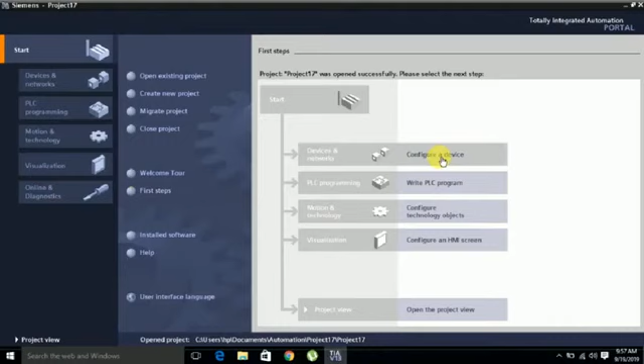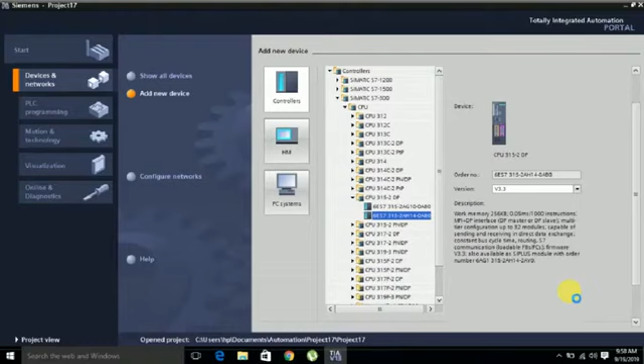So today first I will select one CPU. This CPU selection depends upon which CPU you have available. If you have one physically available, select it according to your physical model and series. I have this 315-2 DP, so it's like this. Then I will add one card.

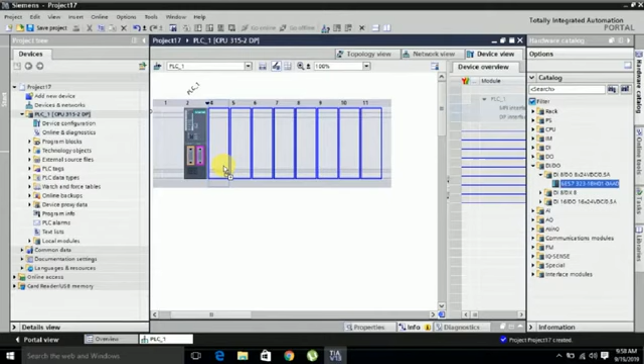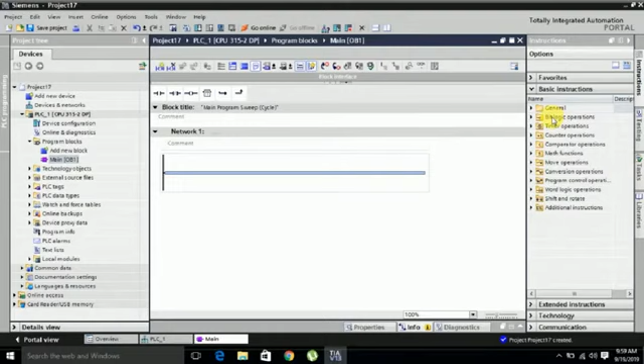Okay, our device configuration is complete, so I will go to the main block, OB1, and do the programming that you already saw in my last video. We already discussed general instructions, bit logic instructions and timer operations. So today we will go to counter operations and see this counter.

In Siemens there are 3 types of counters available: counter up, counter down and counter up-down. Normally counter up is used; counter down and counter up-down are not used much. In other PLC models mostly only counter up is available. In some cases down is available, but up-down is normally not available in other brands like Allen Bradley, Mitsubishi and Delta. It is only for Siemens.

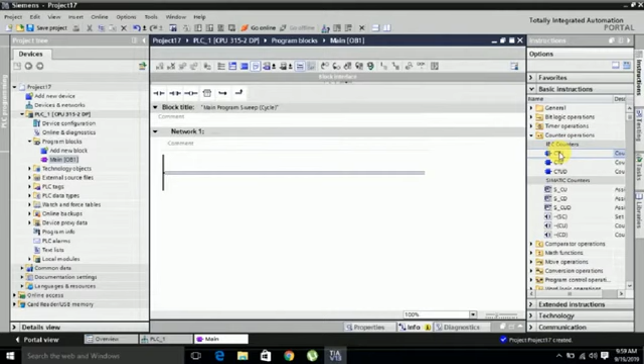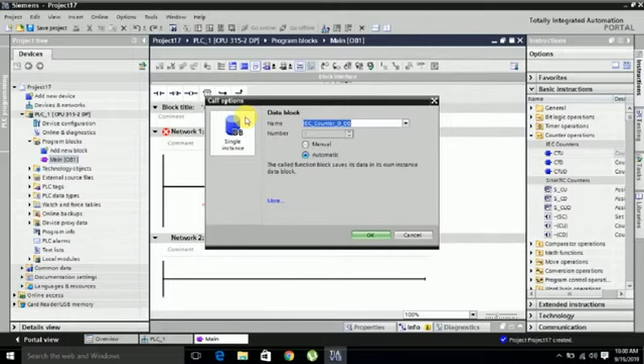So first we will check this counter up. When I click it, it will give the data block. Actually that is a block. Another language is the function block language, which we are not using, but in ladder we sometimes mix block language and instruction list. Here they show the data block, and later in our video we will see this add new block, what it means, and you can see this data block in detail.

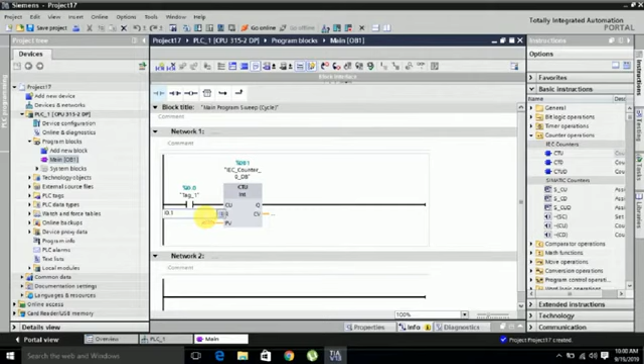Here we use one input for enabling, I0.0, and for reset I directly put I0.1. You can also write it directly here, no issue. The PV shows your counter preset value, how much you want to count. When it achieves this value, your output will be enabled. So I will go to the output also.

Q shows the output in Siemens, as I told previously, and CV is if you want to see your counter value in any SCADA or HMI display, you can tag it here and then this tag is attached to the SCADA or HMI. Here we are not using SCADA, so you can spare it. When I do SCADA and HMI, I will show you how to use this CV, because it is required to connect HMI and SCADA.

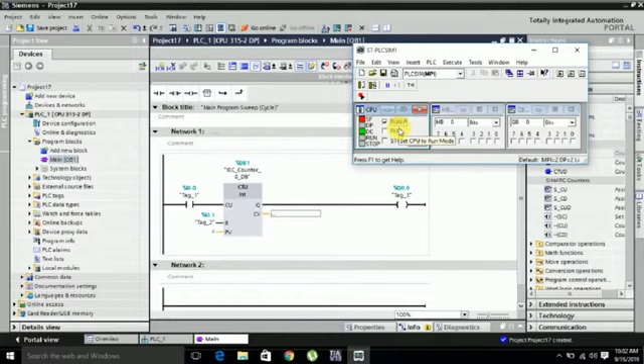Okay, we will go and simulate. This programming is complete for this counter up. I will run the PLC. Now our PLC is running. Here I will go to our interfaces, PG interface Profibus, and PG/PC interface PLCSIM. I will do the searching, and I will load.

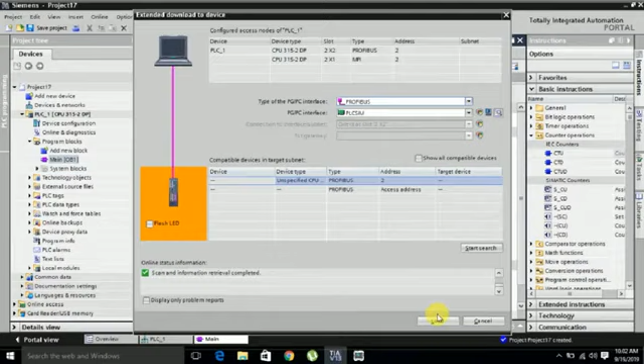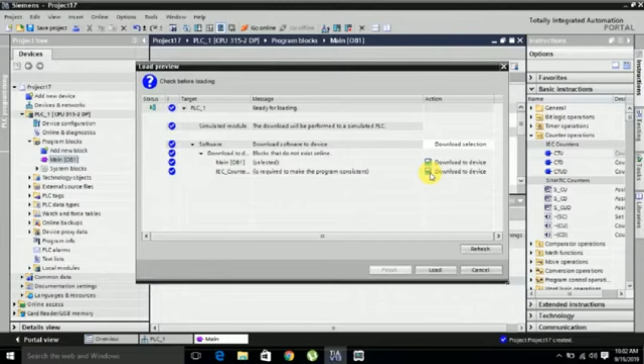Okay, when you use any counter or any timer, as I already told you, you also need to select download to device, because it's a separate block that you need to download. I already told you before that it is a block. So I will open the monitor also. You can see here in monitoring.

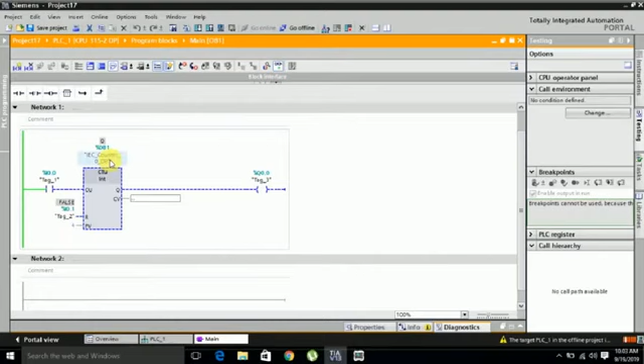Okay, we'll start. You see, till now our counter is not enabled, it is off, and its value is also false because we have not reset. Its target value is 4 and the counter value is 0, and our output is also off. I will show here. First I will use one bit. I will turn it on.

Okay, one. I will turn it on one time and close. Here is one time on. Then I will go second, 2, third, and on the fourth it should be on. You see here, when the counter value 4 matches our PV, it gives the output. When we reset, the value is again 0.

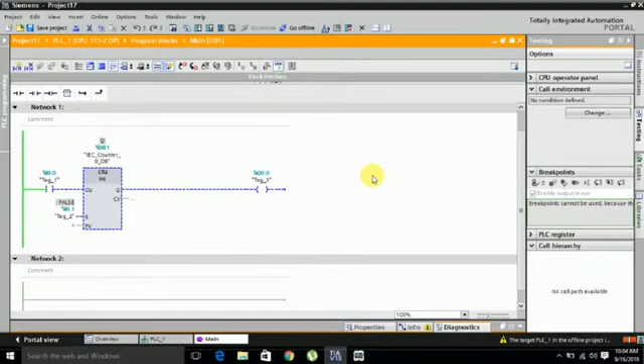Again we will do it, see, that is a counter up because it's going to the positive side. So let's see the counter down. We will use counter down. Same thing, they are asking for the data block. Okay, automatically. LD. Okay, same.

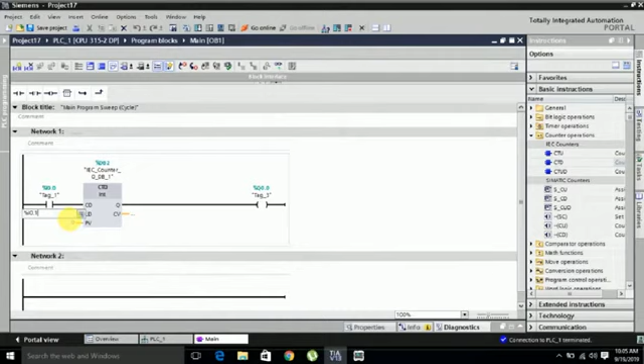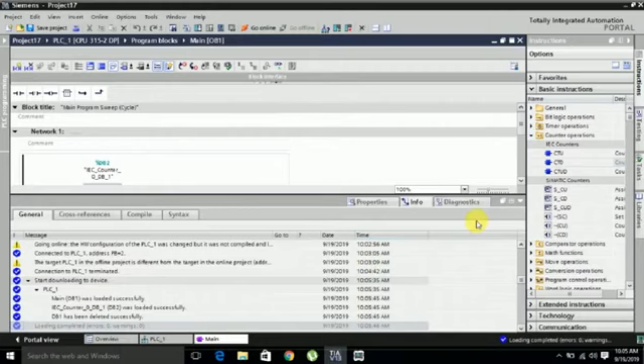LD: you see, in our counter up we used reset. Here it is load, meaning you can load your maximum value. For load I will use I0.1. Counter value I will again put 4. Okay, I will download. Delete means this old block is saved in its memory, so I want to delete it and download the new one to the device. The counter is automatically loaded in its device, that's why we need to delete the old one and load the new one.

See why it is showing? It is showing because our counter value is 4 but our value is already less, so when you count it is going down like -2, -3. Now it is going down, reducing. Before, it was going up, now it is reducing. So what we will do, we will use load data. Load data will load this 4. Now it loads 4, the value is matching, and it will give 0 here.

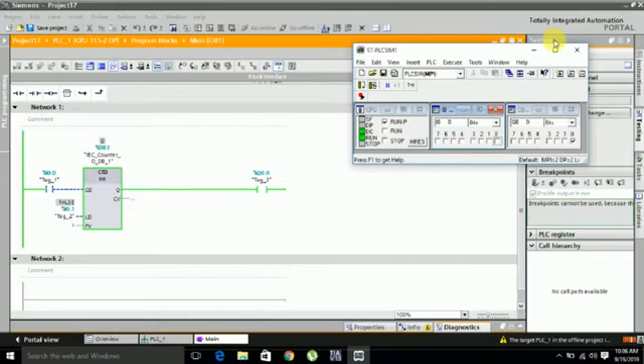Actually it's reverse. When I use this one, you see, when it goes to 0, it will be on like this. That is a counter down. So if you have any confusion, you can text me. I will explain again about this.

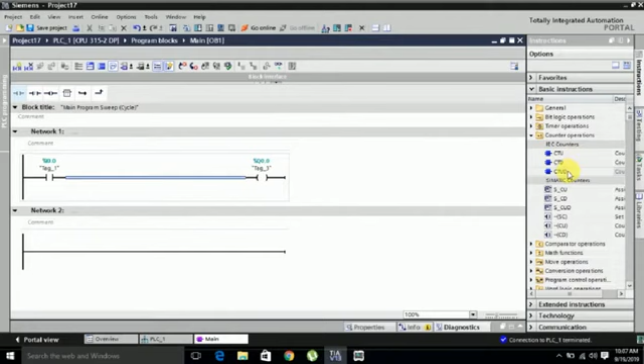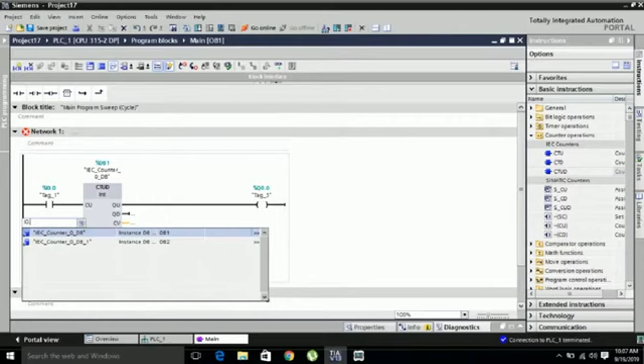So now we will discuss the counter up down. Same thing, you can select it. Here you see counter up: when I enable it, it will count up. Counter down: when I use this one, it will count downward and reduce your counter value. Reset: when I use this, it will reset to its original value, 0. Load: as you saw in counter down, load puts your PV value into the counter value.

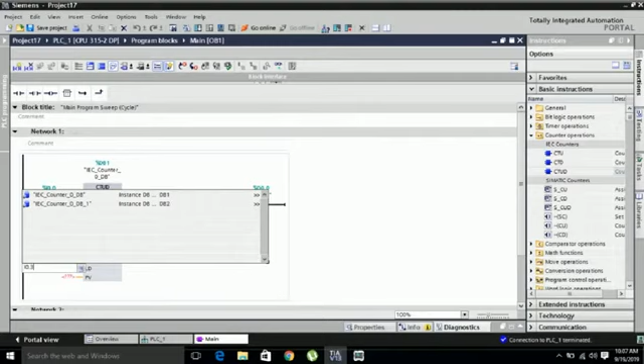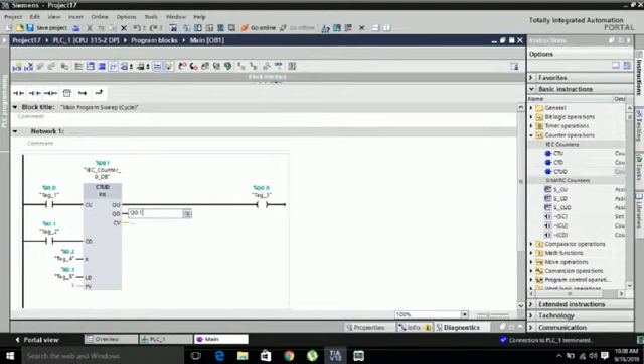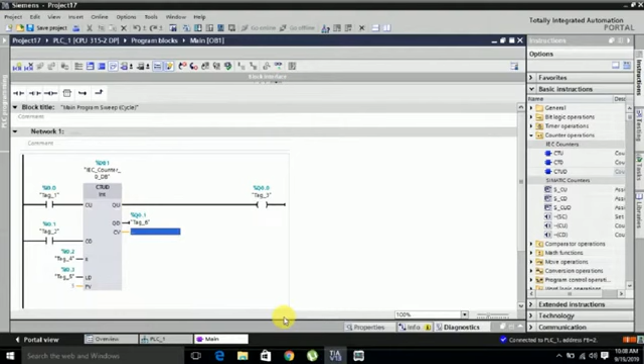Okay, I will use 5. With this counter, when counting up and the target is achieved, Q0.0 will be on, and it will be on when counting down and the target is achieved. It's not used much in industry, and other PLC brands don't have this counter, so don't worry about it. But if you have any confusion, you can ask me anytime.

So first we will see counter up. You see here it is 0. I will use counter up, and at 0 the counter down output is enabled, it's already enabled. But when I count up, the value is 1 and the counter down output is off. Let's see, first counter up, 2, 3, 4 and 5. This output is on. Now I will reset. When I reset, counter down turns on automatically.

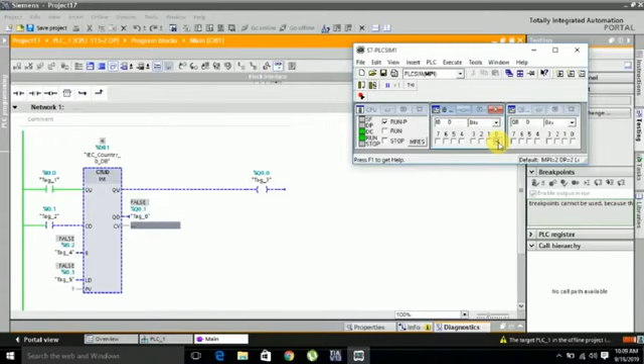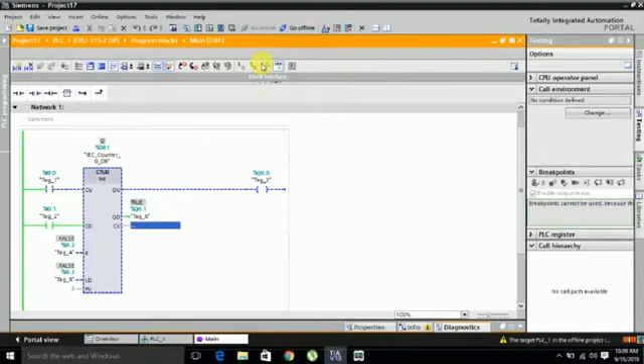Second, I will count up. I will go to 5, on. Now I need to count down. I will use that input to reduce the counter value. Okay, now you see the value is going 3, 2, 1, 0. That's true. So that is the counter that we use in our programming.

So if you have any query about this counter, you can text me or comment on the video. I will explain again regarding your confusion.